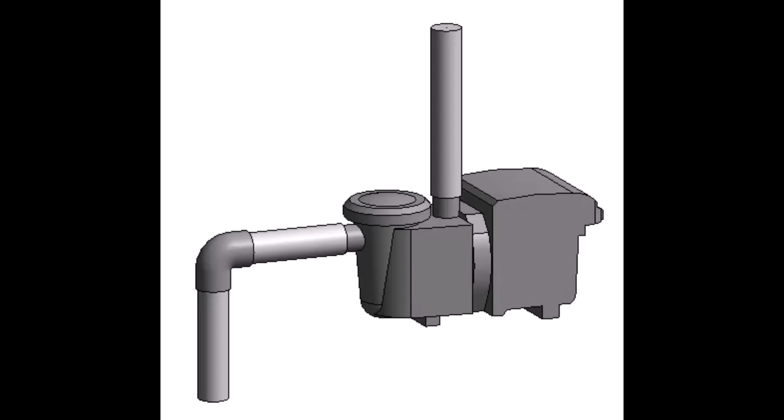I'm going to build this based on the IntelliFlo3 VSF pool pump by Pentair. I'll include a link below in the description.

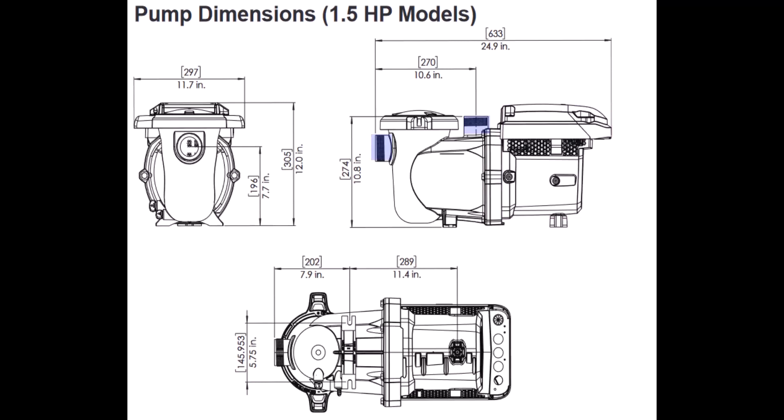This won't be a parametric family as it is a one-off, which should make this much easier to model. I see this pump as 4 discrete parts: the filter here on the left, this chamber area, this flange, and the motor. I'll try to keep the geometries to these 4 discrete parts when modeling them.

I'm going to take a screenshot of this and save it to my desktop. Next, I'll insert it into a view and scale it to match the reference planes that I'm going to draw.

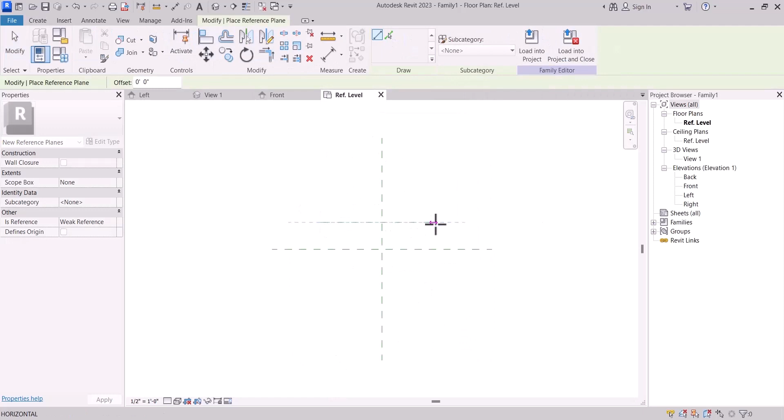I'll start by creating a new family from a template. I'm choosing a generic model family to start, then I'll switch the family category to plumbing equipment. I'm not sure if this is the correct category for pool equipment, but it'll be a good start.

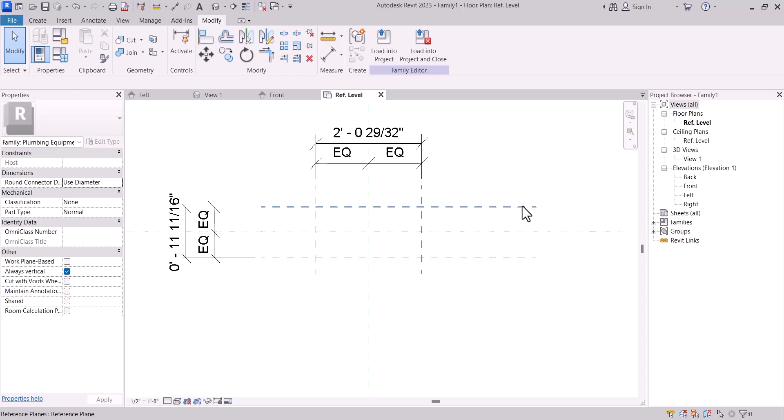Let's build out the rough boundaries of the geometry. I'll speed this part up to reduce the tutorial total length. I'll add a few extra reference planes for the center of the geometries and name them.

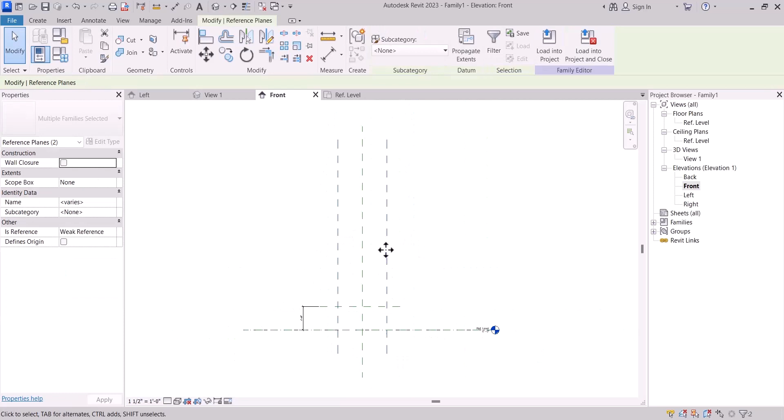I'll place the image in the other views as well. If you notice, you'll see the drawing doesn't match 100% with the given dimensions in the cut sheet, but that's okay because we're just going to place it in sketch.

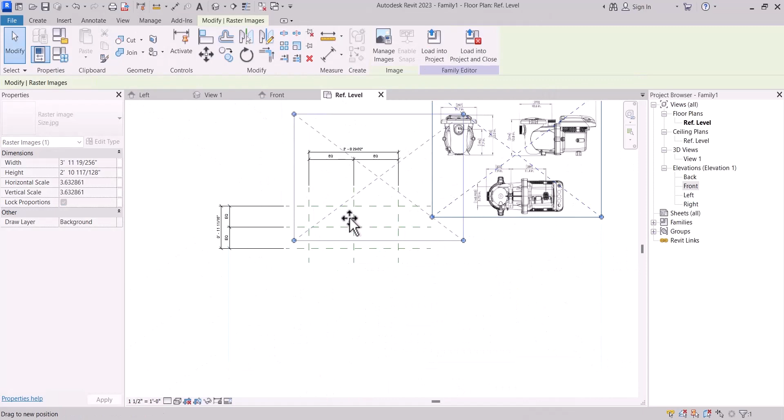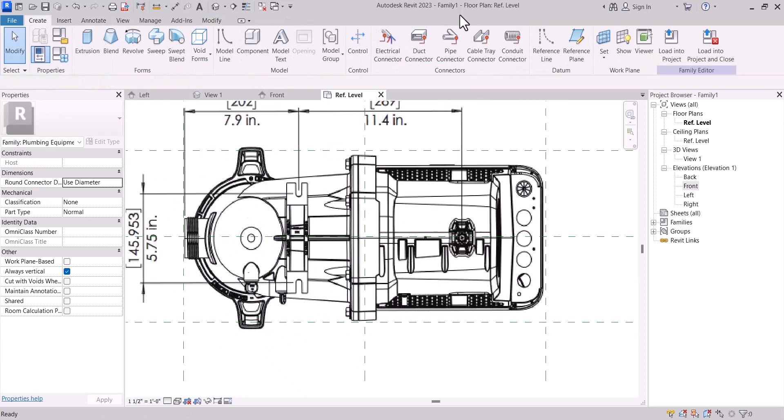I'll place the image. If you notice, you'll see the drawing doesn't match 100% with the given dimensions in the cut sheet, but that's okay because we're just going to place it in sketch.

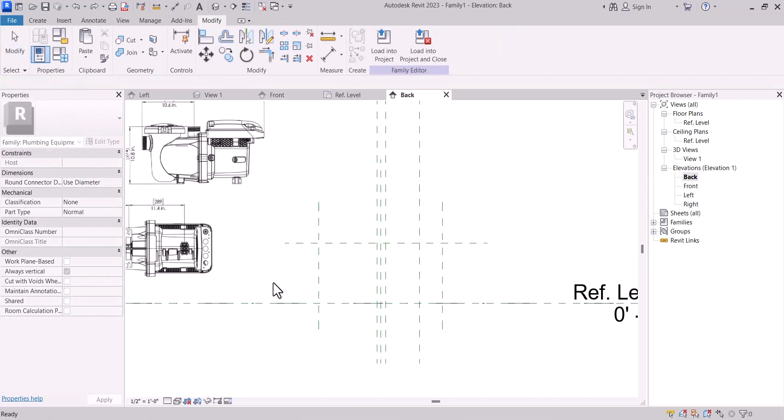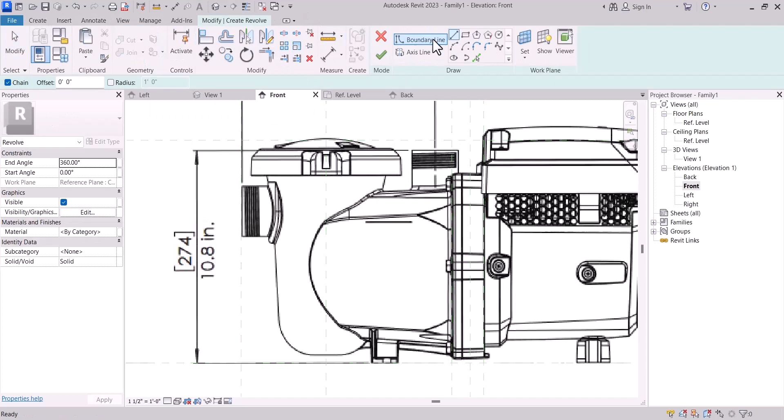For this filter, I'll use the revolve geometry. I'll sketch the profile as I see in full, and then I'll delete half of it and draw the axis about that half point. And then when it completely revolves, it'll be symmetrical.

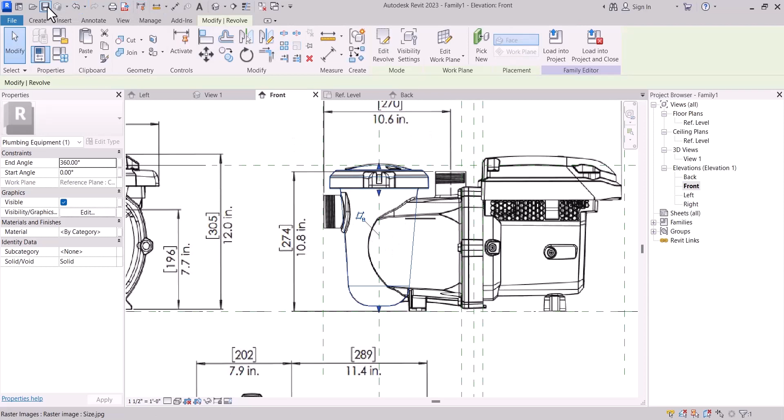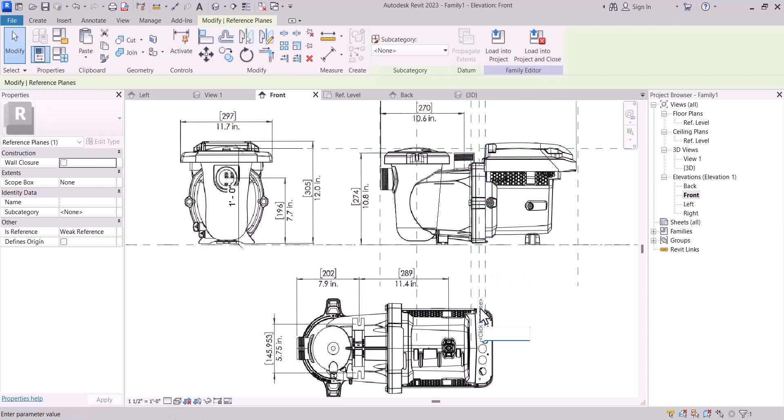I'll rename some of these reference planes to flange and motor so that when I draw an extrusion, I can host it off of that plane.

I'll go to the left view and sketch the flange profile. This is a simple extrusion from front to back, and I'll use the flange reference plane as the work plane.

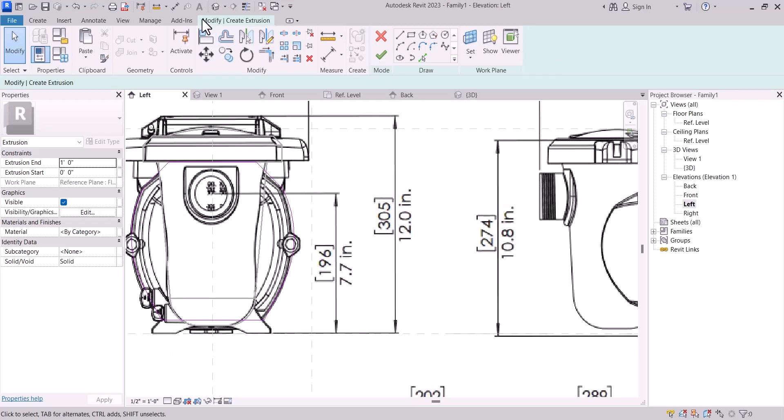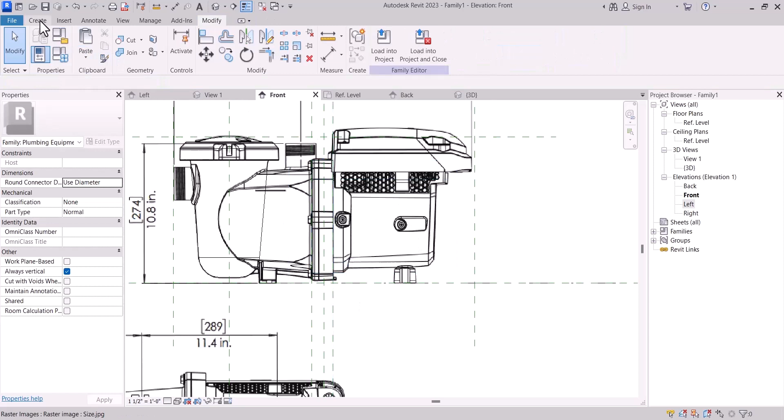Next up, in the front view, I'll use the extrusion tool to model the motor chamber. Then I'll draw the rough boundary and clean up the line work.

In the floor plan view, I'll sketch the chamber, then change the height and elevation.

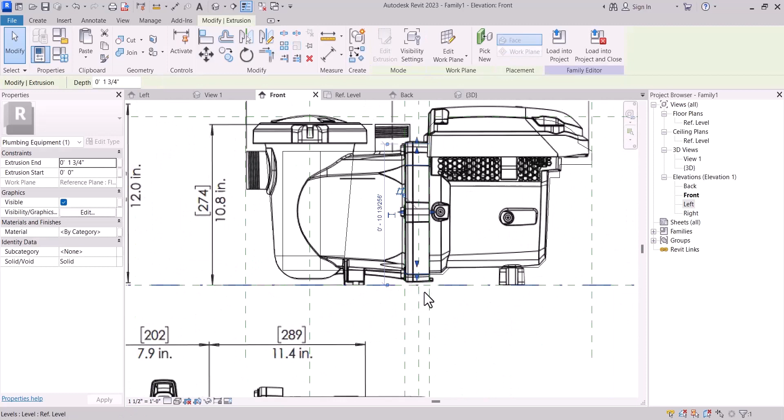I'll create a reference plane up here for the top of the out nozzle, and I'll name it out.

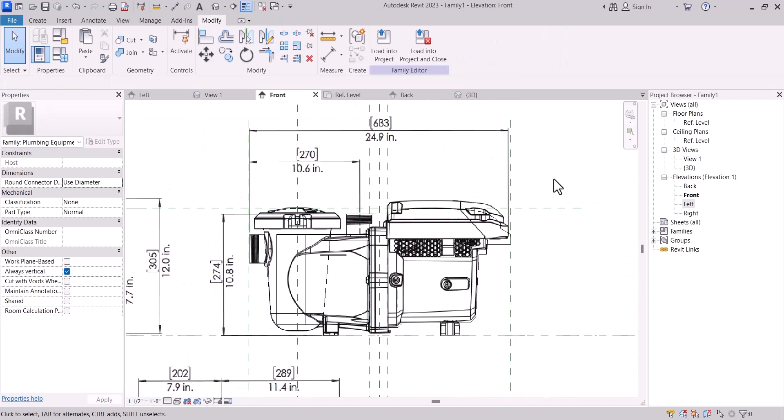Back in the floor plan, I'll clean up the depth of the extrusion for the rear motor chamber.

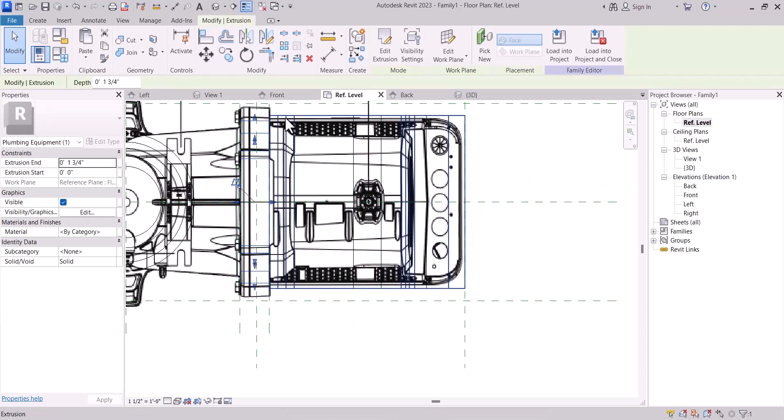You can even take a moment to create a void extrusion here to round out these corners. At this point, there's not much needed to visually identify this as a pump, so an extra detail is for your own preference. If you wanted to use this for visualization or renderings, you'll have to add more detail.

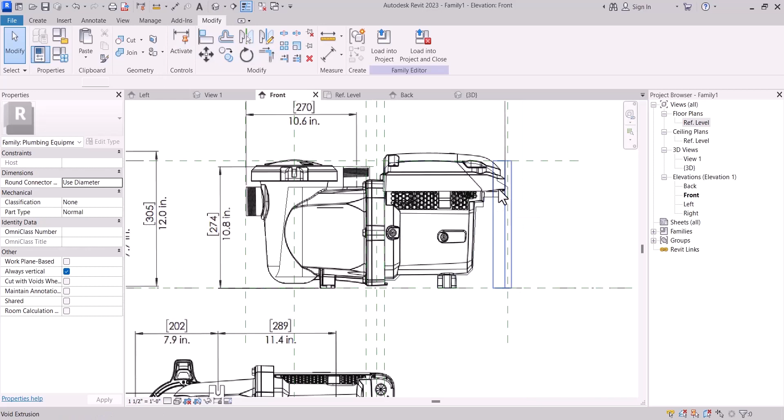I'll take a moment to clean up the reference planes and geometries.

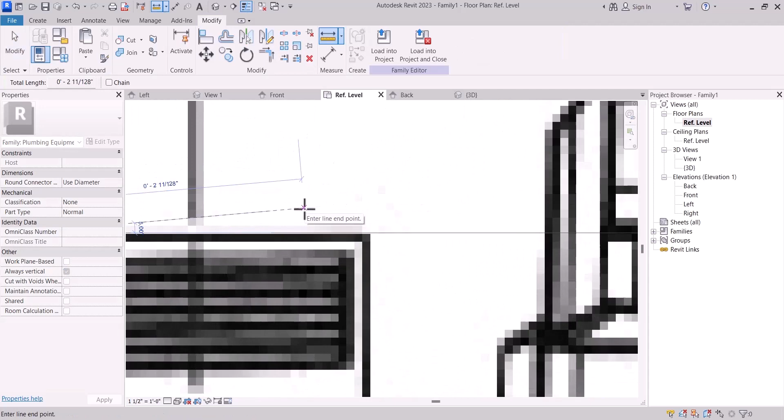I'll draw a reference plane here to locate the nipple, and use an extrusion tool to create the nipple, then change the elevation.

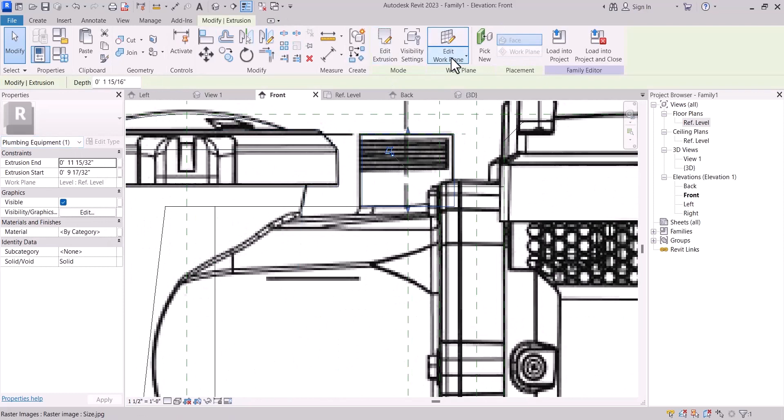Measuring this, it seems like it could be a 2.5-inch nipple for the pipes. Let's go to the plan and create a round extrusion here. In the front elevation, I'll change the Z values.

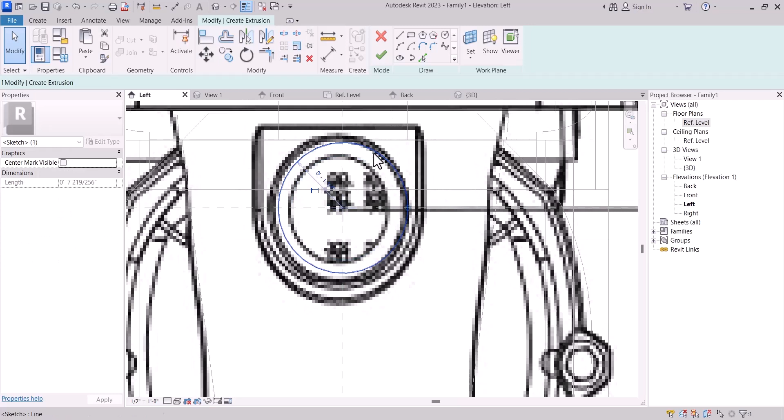I'll do the same thing for the front inlet, create a reference plane with a center line, name it CL, create an extrusion and set the depth. I use the center mark visible parameter to lock it to the vertical and horizontal reference planes. This isn't necessary because it's not parametric, it's just a habit that I get into.

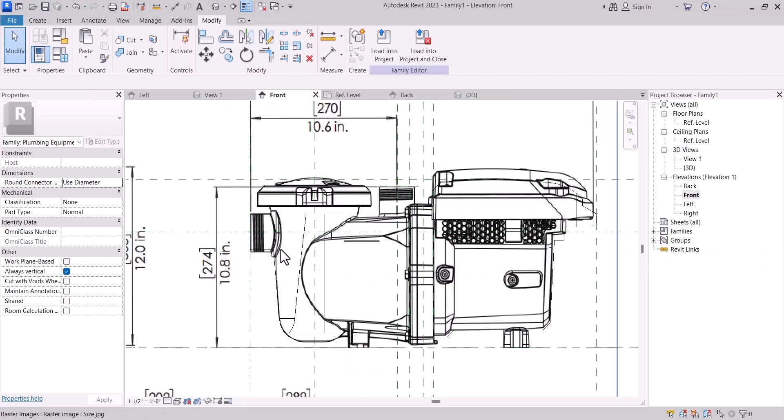I'll draw some small feet for the chamber to sit on and use the extrusion tool from the front plane. I'll extrude the form from the front and back face plus and minus 3.5 inches.

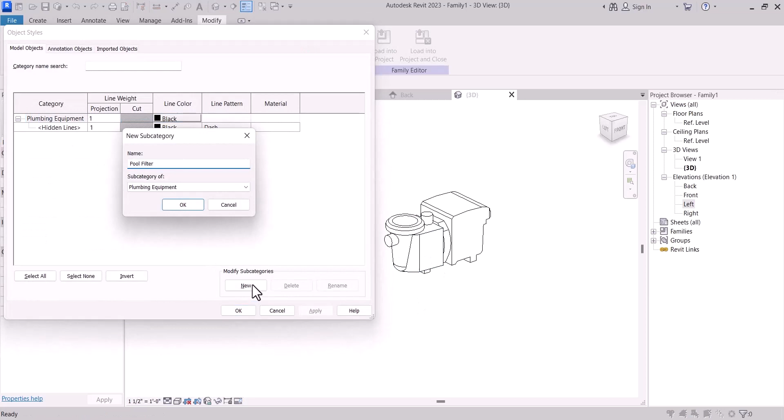Let's create an object style called pool filters so that it can be controlled in the project. I'll associate an OmniClass value, and after fooling around and searching, I settled on external pools and ponds. You can find this location by searching through your C drive for OmniClass taxonomy, or going to C Program Data, Autodesk, RVT in your version number, and the user data cache.

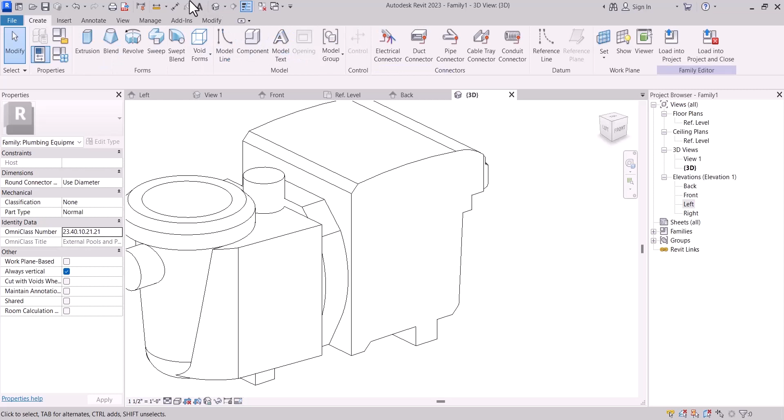Next up, I'll add pipe connectors so we connect to the system in the project. I'm using a 2.5-inch pipe and not making it parametric for this video, though you may want to if you're going to use this in multiple projects.

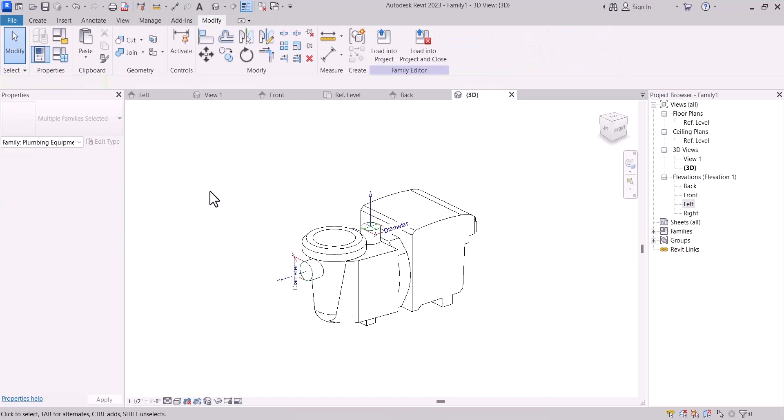I'll create an electric connector and choose controls for the system type. I'll add a second electrical connector for the power and give it the connector description of automation.

When you start with the non-electrical family category, you're going to have to recreate the voltage and apparent load family parameters.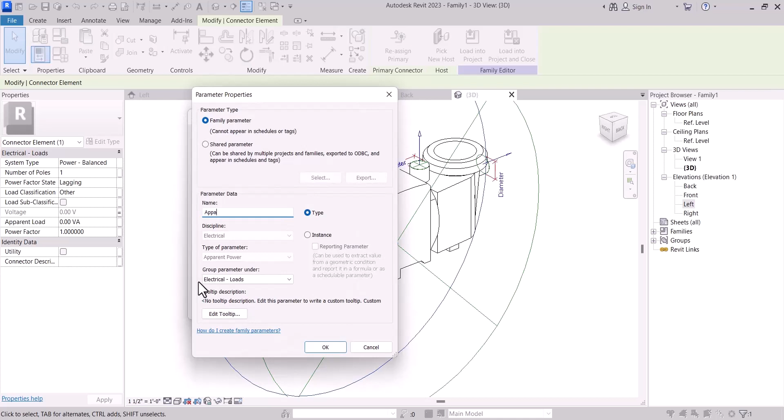I'm going to save the family with the CSI spec section of 13, 11, 49, and filter pump, and I'll load it in.

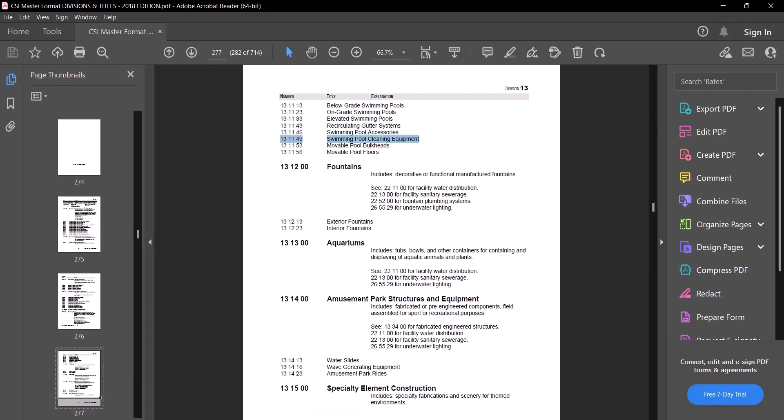I'll save the project as well.

When loading it in, you can see the 3 connectors that we created.

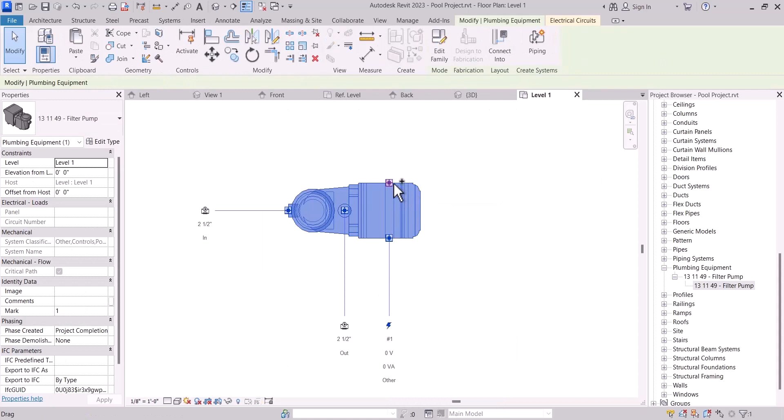Let's make a pipe for the in pipe. While trying to draw the pipe, I noticed the routing preferences didn't have an elbow selected, so load some in and choose that type in the pipe settings.

I'll choose PVC for this default in the project. It might be a specialized PVC in your discipline, I'm not sure.

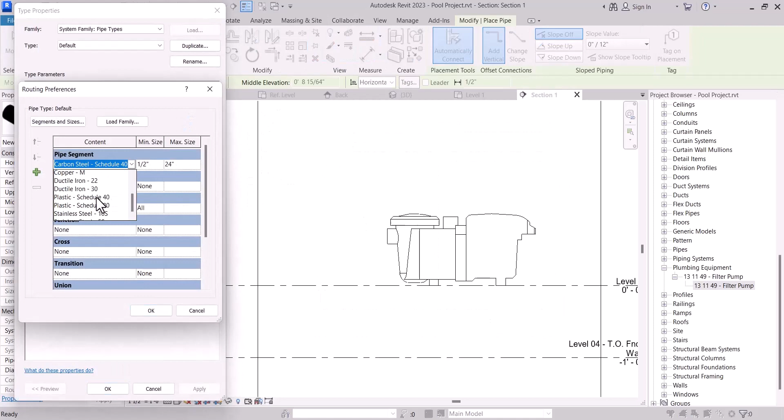I'm just going to speed through all of my fumbling to save you a bit of time.

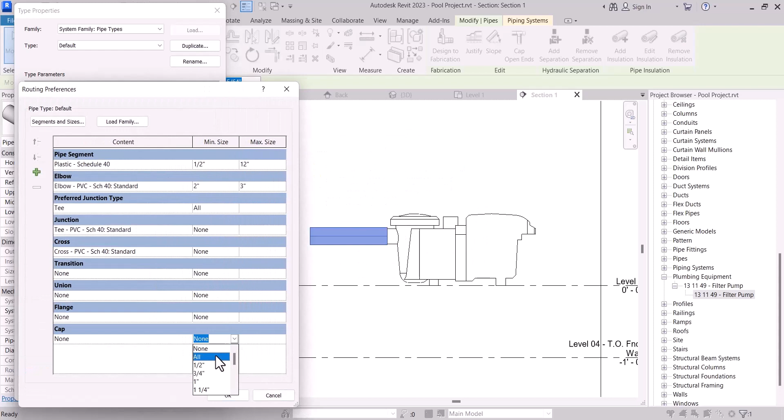I'll also draw a pipe from the out connector.

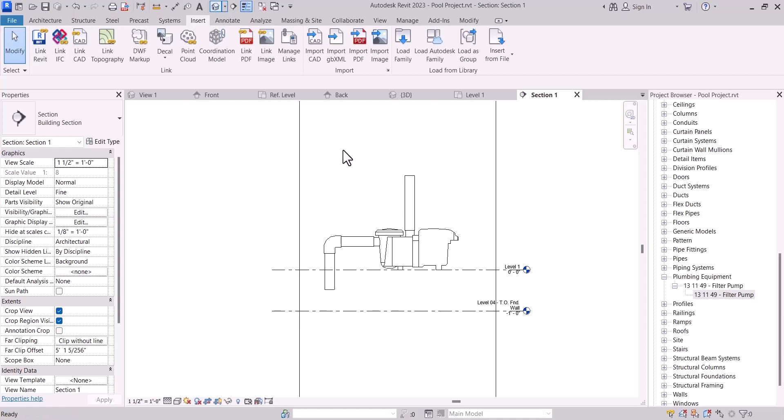Before we use this family, take a moment to edit it and delete the images that we imported and copied around. You could take some time to clean it up further and make sure that you apply materials to the geometries. If I were in the pool industry, I'd make the family a bit cleaner and associate an annotation to the plan view so we could show it on plans easier.